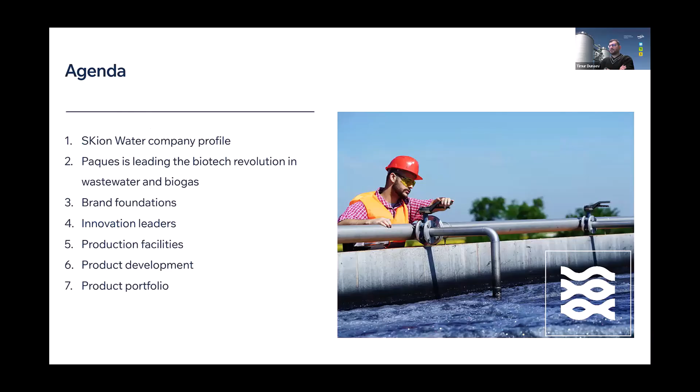As of 2013-2018, which was the period of acquisition, we're now not a privately owned company, but rather owned by SKion Water, a group of companies with more than 14 portfolio companies generating more than 1.5 billion euros in revenue per year—those are the last figures from last year, so very fresh. It's good to be part of a group specifically oriented towards water, wastewater, and renewables business.

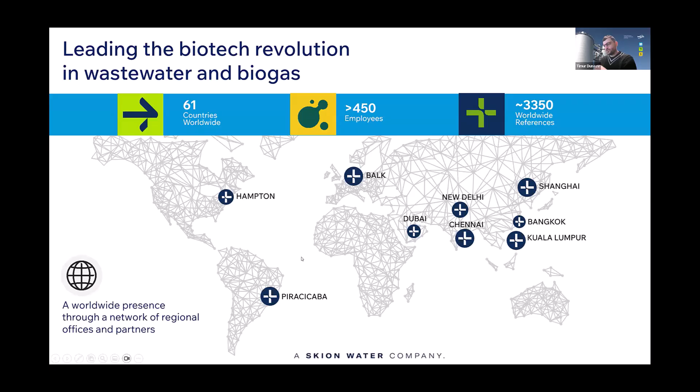Here are the portfolio companies, and Paques is shown right here in Friesland in the Netherlands, which is where the headquarters and the original business started—this is more of a Paques-specific map. We're talking about this business unit right here, which I call C2C, Caribbean to Canada, because that's the basic territory we cover as Paques North America. In Paques North America we are a fully functional, separate business unit with full project execution capabilities across the entirety of our region, including procurement, project engineering, management, commissioning, startup, and everything related to EP project execution.

As I said, the historical development of the technologies is shown right here on the slide, and today we're going to concentrate very specifically on this one. The very first technology was introduced to market in 2017. By now we have over a dozen installations across the world, and I'll be presenting more numbers on that.

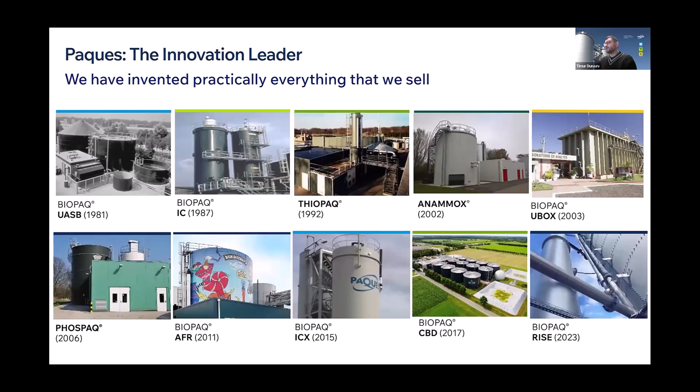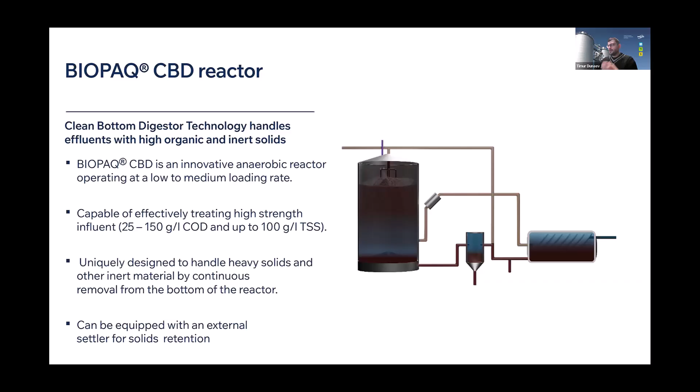Some good slides to see when the presentation is sent out, but I want to concentrate on the technology itself. CBD is specifically designed as a completely stirred reactor with the addition of a few opportunities, as I called them, that are uniquely designed to continuously address, or better said prevent, the accumulation of heavy solids within the vessel. So let's chat about how we're going to do it.

The problem statement for this technology, as I see it in North America, is high grit or sand-laden, or let's say earth-laden substrates. In this specific case, I'm showing sand-bedded manure, but actually for a lot of food digesters grit is also a big problem—it depends on how much you bring together with the source. This is one of the most stark examples you'll see on your screens, and that's why I like to use it.

The problem statement is this: if you pre-treat any amount of sand or grit preliminarily, you'll definitely be losing some of the volatile solids, because it's fully impossible to separate grit or sand with 100% efficiency. That's also the case for our technology, but the main difference is that separation happens post-digestion or during digestion, not prior to digestion, which is the important part. As you know from your calculations, that additional 5 to 10% VS loss that could happen if you pre-treat your substrate is quite an important addition to the biogas generated, especially for RNG facilities.

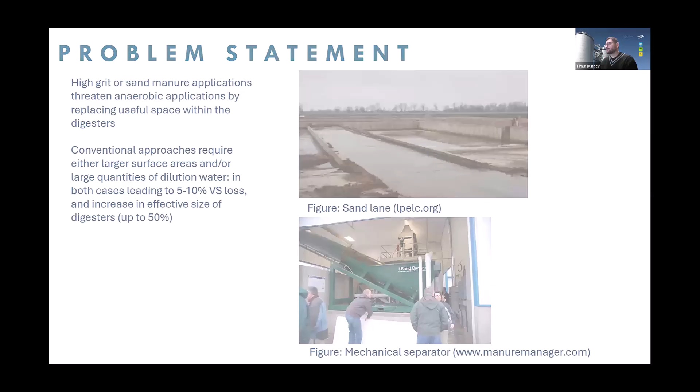So let's talk about the meat and potatoes of the things. The basic idea is that we have a completely stirred reactor where we create a continuous downward flow for the purposes of mixing, with quite a high specific energy put into the system for mixing.

Doing that, we accomplish a few things. Thing number one, and there will be a separate slide on that as well, we're continuously beating down any formation of the scum layer on top. For anyone who has operated digesters, you know that formation of scum, especially for high solid substrates, can be quite a problematic situation if you build up a scum layer on top and don't continuously mix it in. The continuous recirculation of mixing creates a beat-down effect on potential scum formation.

Together with that, we're inducing an additional downward flow within the reactor to aid gravity in selective precipitation or sedimentation of heavy solids, because they either precipitate and form there, or they're introduced together with the substrate.

Once they make their way to the bottom, both through gravity and a forced induced flow, there's a hydraulic scraper continuously moving on the bottom of the reactor, with the entirety of the operation situated on the outside of the vessel. So there are no driving parts on the inside—only an isolated, fully sealed gearbox.

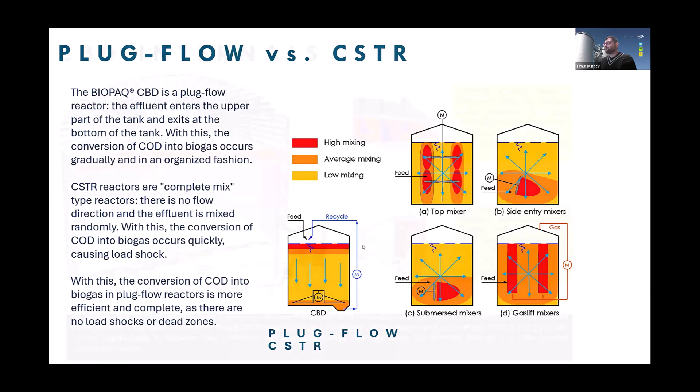I'm making this distinction because when I model this, in purely technical chemical engineering terms, this is a CSTR, but the mixing method is modeled as plug flow mixing for this specific system. And a picture is worth a thousand words, right?

What you see here are recirculation pumps and the drive mechanism for the rake that continuously moves on the bottom. That's the precast drive into it. The only gearbox is there, and it's completely isolated from the environment of the digester. Then we recirculate and create quadrants of mixing with angled nozzles on the top of the reactor, continuously inducing both downward spiral flow and beating down of the scum layer.

Over 18 installations - I think I said 14 in the beginning, forgive me for that - across food, pharmaceutical, fermentation, agricultural, manure, and distilleries business.

Once again, the highlight and the point of engagement with the system is high grit or high potential precipitation formation. The reason distilleries are highlighted is if you've done corn to ethanol stillage, you know it has high calcium, high magnesium, high phosphorus, high nitrogen. So you form calcium phosphates readily in those environments, which makes it a very good candidate for CBD.

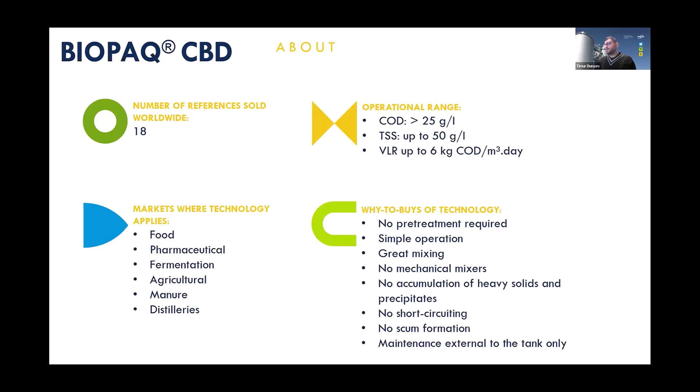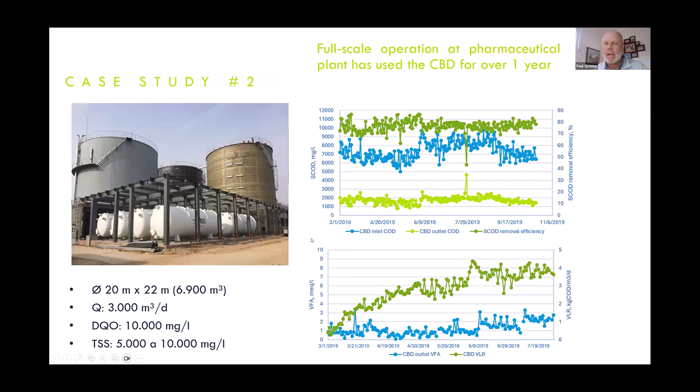Timur, we had the perfect question come in. How do we prevent those bottom holes from plugging? That's an excellent question - I'll go back to the bottom.

Some of you have spoken to me. I'm a big proponent of not promising what I call pixie dust or fairy dust and no magic wands. Indeed, the bottom holes have a high potential for creating precipitation, and we're not dealing with that by ignoring it. So there are quite a few mechanical additions to the system, and obviously this is not a P&ID - if anyone wants to go in depth, I can show the potential P&IDs as well.

So there's a few things. Thing number one, first of all, we have quite a high hydrostatic pressure - the minimum height here is 65 feet, right? And the entirety of the hydrostatic pressure is pushing on this.

So these holes are not just a shallow flow. This is high hydrostatic pressure with high potential to push things through. That's number one. Number two, high recirculation velocity. Here's another rule of thumb for anyone taking notes: for a 2.5 million gallon digester, the recirculation flow rate is going to be around 4,000 GPM. So we're creating high scouring velocity in those channels as well.

So we're making sure it's way more than 3 meters per second, which prevents any particles from accumulating there. That's number two. Number three, every single pipe connection has both flush nozzles and pigging nozzles—rodding or pigging, depending on what side of the world you're from. I think in the US we use pigging. There are blind flange connections on the T's in order for you to inject high nitrogen or high water flow if you need to flush it through under certain requirements. And if you start accumulating solids, there's a blind flange on the T section of that pipe that you can send a pig through if you need to clean the channels a little bit. Good, thank you. Good question, by the way—I love that question.

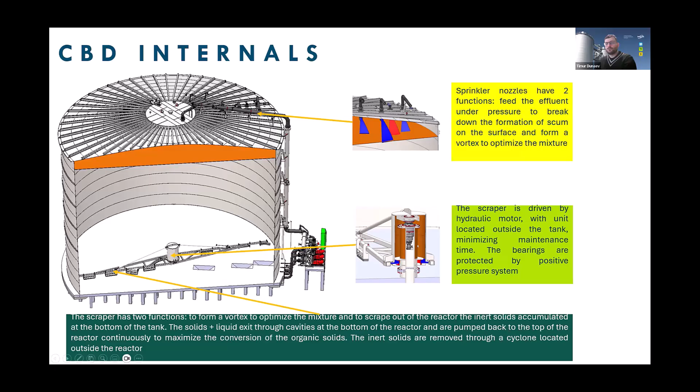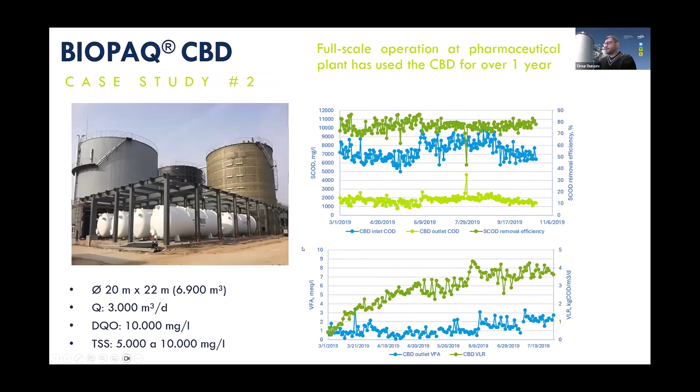Another installation, pharmaceutical—just another cool photo with a lot of information, but I think I'll highlight this one. I think most people in the RNG industry have heard about this project, quite a prominent one. We're glad to be part of it. This is a Green Create project in Wijster. They're a company that created the whole treatment schematic, but the anaerobic digesters and biogas desulfurization at this facility were provided by Paques, and the digesters are CBDs. What I like to highlight here, first of all, it's always cool to show big installations—it's a really nice 12-tank installation. But the reason I like this photo, besides the obvious awesome factor of a large installation, is that you see the external drive sitting outside of the system. And besides the piping for recirculation and the biogas collection piping, there is literally nothing else on the walls of the digester or supported there. And if anyone has ever operated side entry mixers or anything of the sorts, you know why I'm highlighting this.

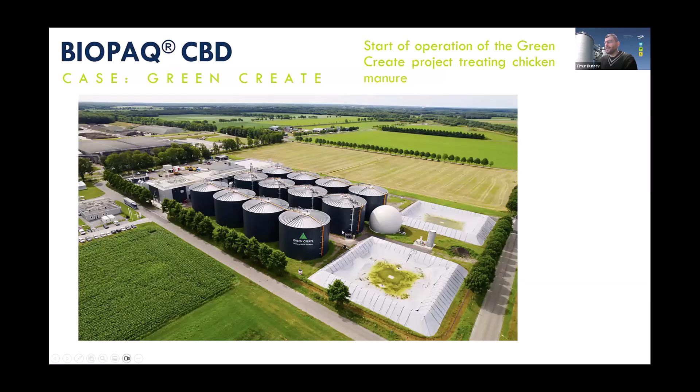We're at 19 minutes, Paul. I think that was the call, right? 19 minutes. Yeah, I think so as well.

Question came in: what volume of the reactor is gas that is held up by lack of mixing? I've read this a couple times myself, but I'm not fully sure what the question means. I get it—volume of the reactor that's held up by improper mixing. Yeah, I don't know what that means exactly. I'll respond to what's on top of my mind—might be completely off, but please feel free to drop a message clarifying. So, here we go.

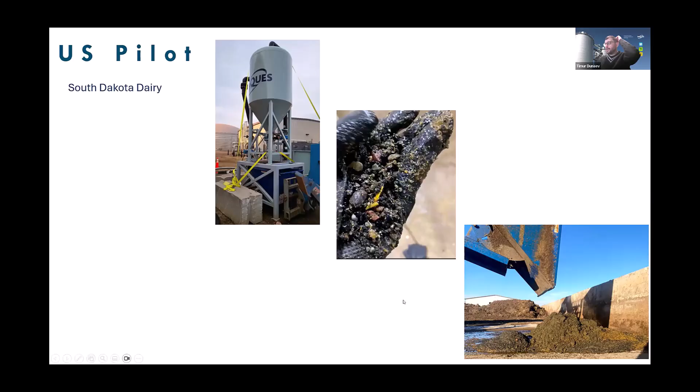How is heating accomplished? Heating could be accomplished many different ways. I'm relatively agnostic on it mechanically, but a large recirculation flow allows us to install heat exchangers right here. If you're asking for my specific preference, shell and tube or spiral heat exchangers is what we use.

So we got clarification on what MTBF is—mean time between failure. Right now we've operated the systems anywhere from 18 months to 7 years without any stoppages.

The 18-month stoppage was to replace a drive on the outside. After that, we changed the drives to the new drives that are now running and haven't had stoppages. That's the answer I have right now. The system in the first photo of installation has not had a stoppage in 7 years—not a single stoppage besides usual O&M on moving parts.

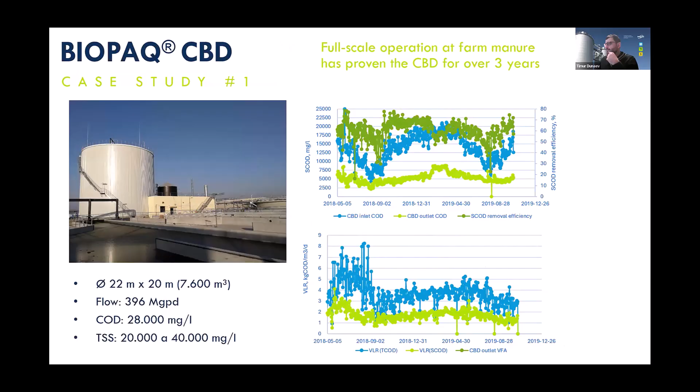Is the feed batch or continuous? Could be both—I prefer continuous, but having continuous recirculation flow allows us to push into that flow, giving a little extra room for semi-batch feeding. I would still be concerned about cleanout between feeds, even on the short feed line. Is there maintenance required on the gearbox within the tank?

No, there is no technical maintenance required. The lifetime should be 15 to 25 years on the gearbox because the oil and compressor line are all pressurized and sit on the outside. We have not had a single gearbox failure to date. Is it possible? Yes, mechanical failure is possible.

What is the typical turnover time of the digester, volume divided by recirculation flow? Twice a day.

Is a macerator required? A macerator would be required, especially depending on the feed and what comes out as straw. We do prefer macerating to be below 4 millimeters in size. That is correct.

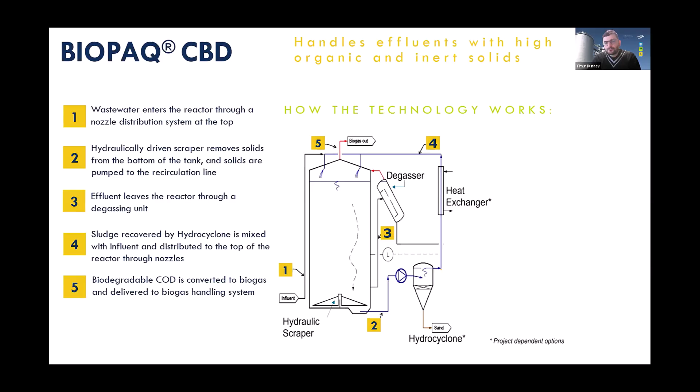So we've had some questions about whether you can do the CBD approach in the full 25-day digester, or whether there'd be any benefit to doing a short CBD cycle in a hydrolysis tank and then just going to a conventional digester after that. Is that worth looking at?

I think if I had a crystal ball into the future, I think that's where we'd head. The challenge with that approach is providing empirical data—everyone loves empirical data. My challenge is, and I won't steal too much time, but if anyone wants to talk it through I'm available. The challenge is addressing variable levels in the pre-acidification tank, addressing HRT, hydrogen formation, specific material selection depending on the formation of VFAs and stuff like that. None of them are insurmountable.

My thing is, I can present full-scale data on manure digesters on the full SRT. We have not yet been able to present data on the pre-acidification tank, but my crystal ball is looking in the same direction.